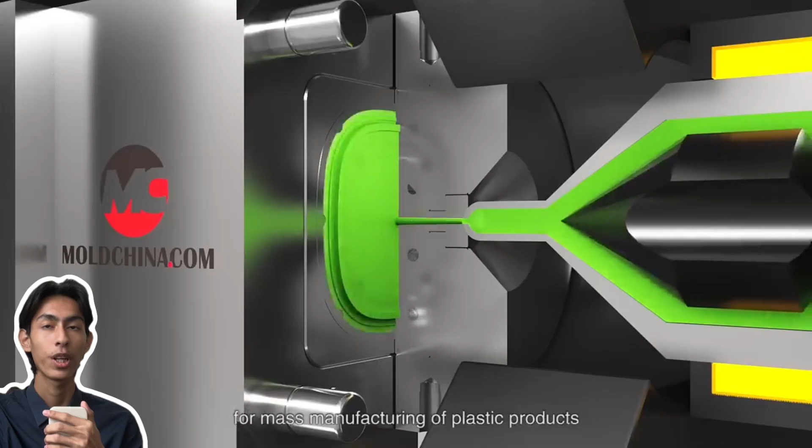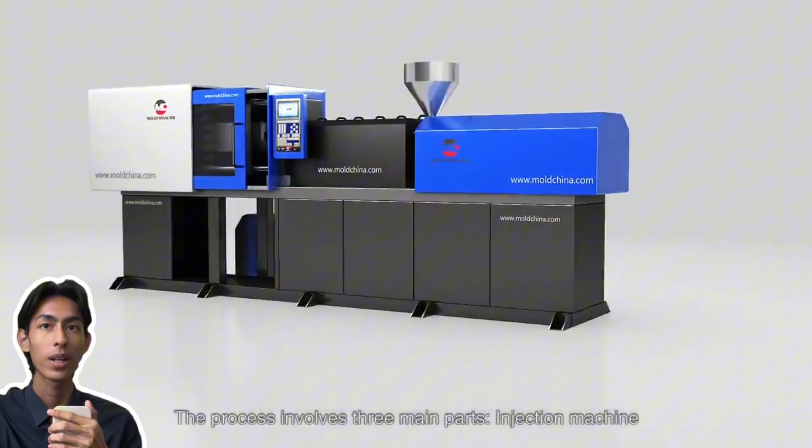Injection molding is the most common method of mass manufacturing of plastic products. The principle is simple: inject the molten plastic material into a mold cavity, let it cool, and then solidify it into the same shape as the contour of the cavity. The process involves three main parts: the injection machine, the plastic injection mold, and the plastic pellets.

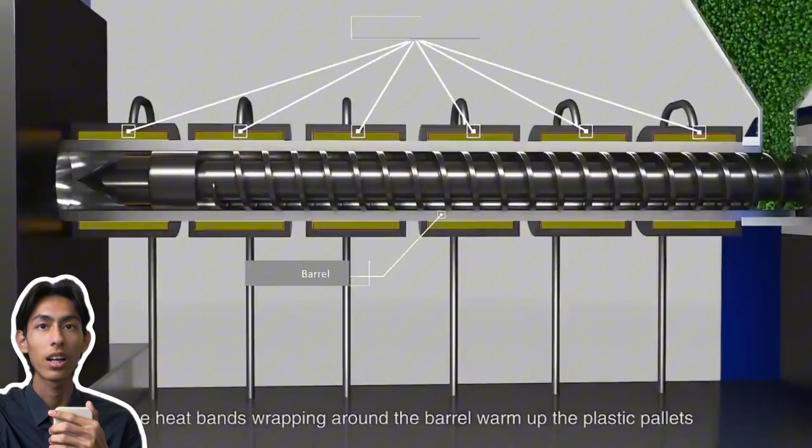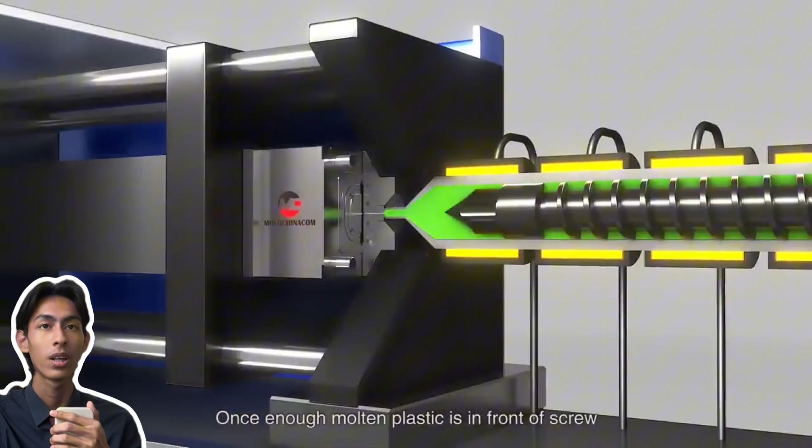Plastic pellets in the hopper are fed into the barrel. Then the rotation screw transports the pellets forward while the heat bands around the barrel melt them. As the pellets move forward, they gradually melt into molten plastic. Once enough molten plastic is in front of the screw, it injects it at high pressure into the mold cavity.

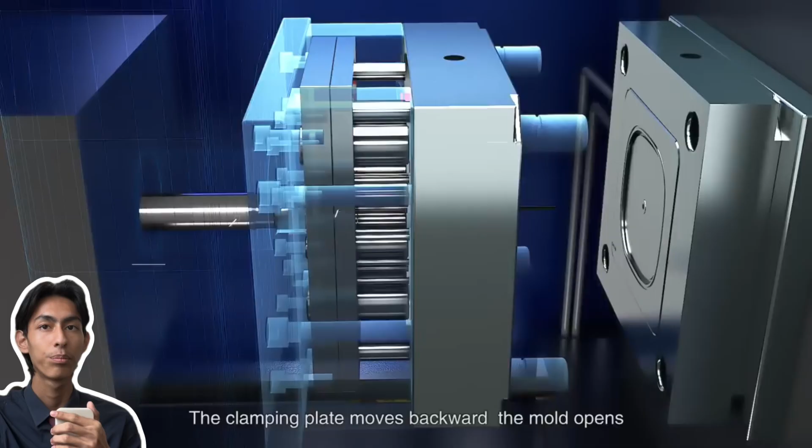The mold temperature is controlled and kept much lower than the barrel, so the molten plastic solidifies quickly. The clamping plate then moves backward, the mold opens, and the ejector pin pushes out the finished part. After that, the mold closes again and the cycle repeats.

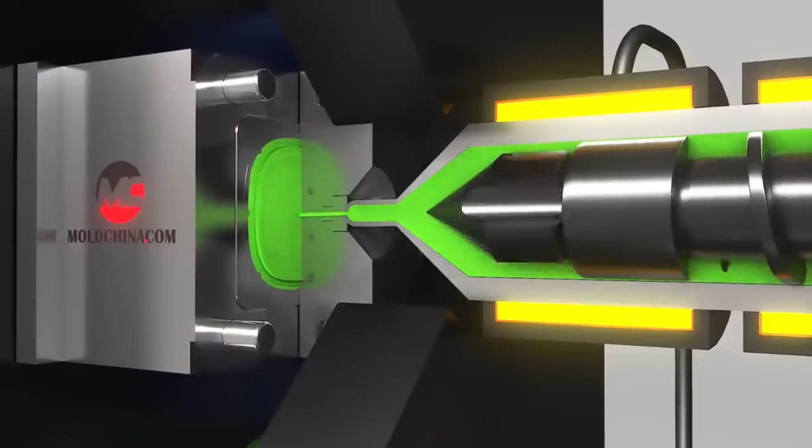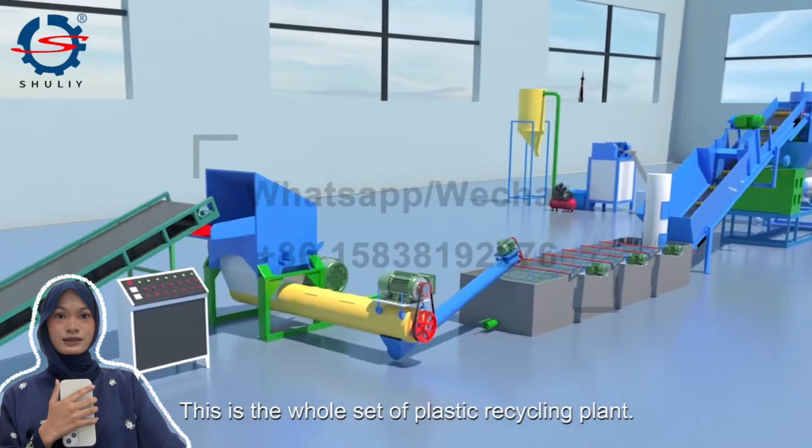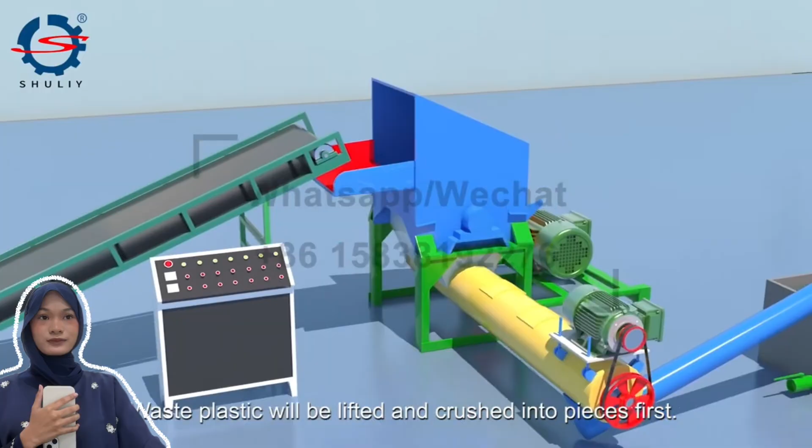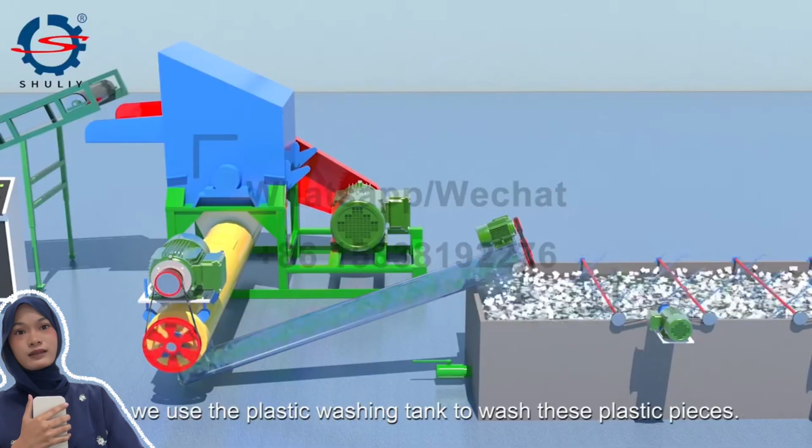This is the whole set of plastic recycling plants. Waste plastic will be lifted and crushed into pieces first. Then we use a plastic washing tank to wash these plastic pieces. After washing, the plastic pieces will be dried and lifted into the plastic granulator machine.

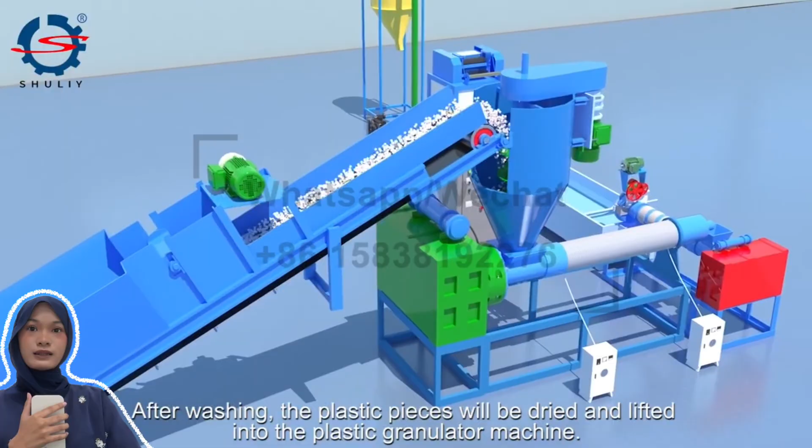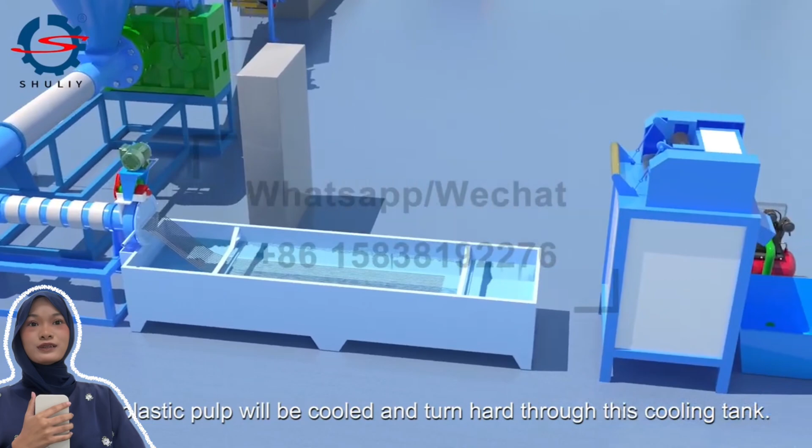Through electric heating, the plastic granulator can melt the plastic and extrude the plastic pulp. The plastic pulp will be cooled and turned hard through this cooling tank. Then the cutter machine can cut the plastic rod into pellets.

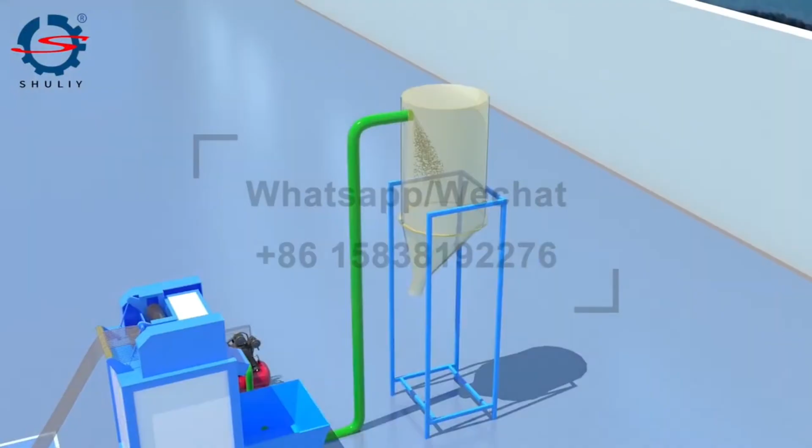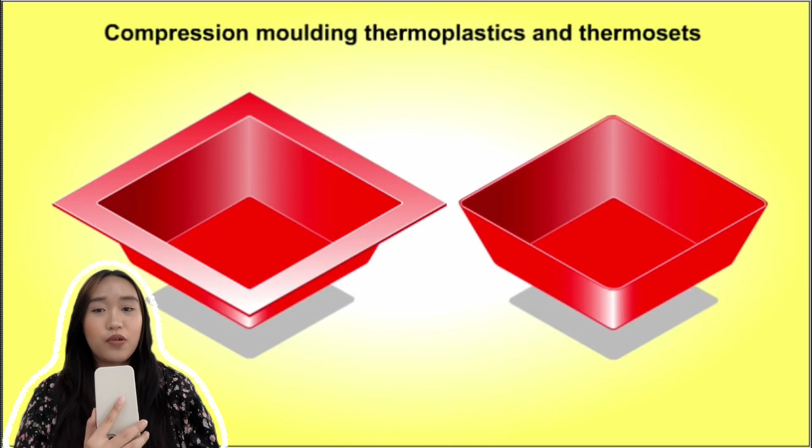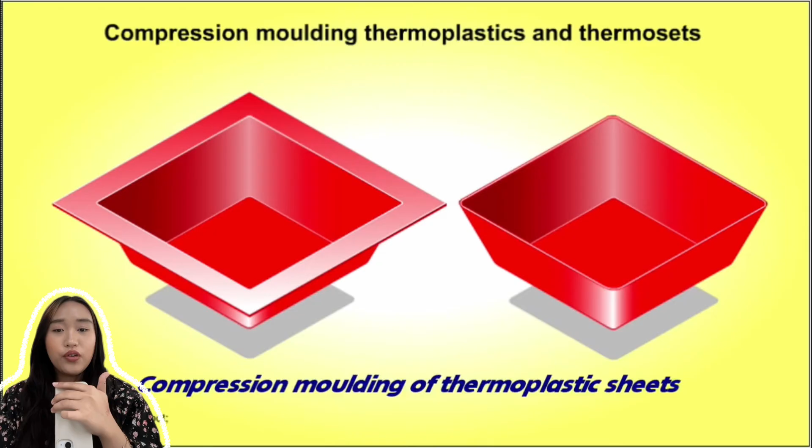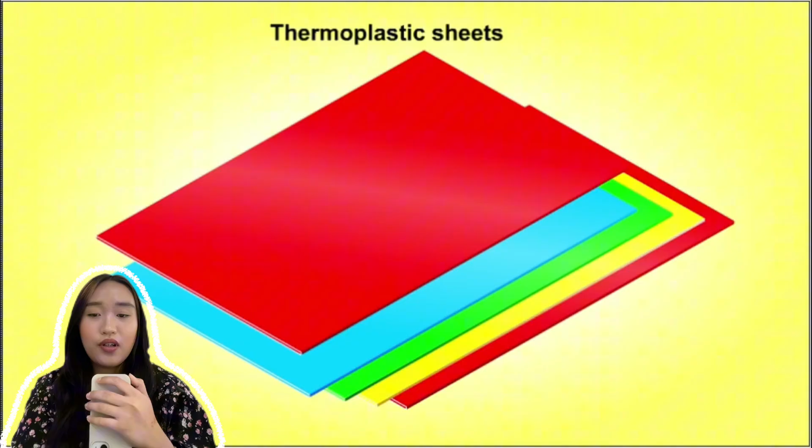This video will show you how dished plastic products like boxes and trays can be made by compression molding. I'm going to show you compression molding of thermoplastic sheet, like acrylic, polypropylene, and polyvinyl chloride. Thermoplastic sheets are usually stiff boards, so they have to be softened by heat before they can be reshaped by compression molding. The thermoplastic sheet is heated in an oven until it's soft and floppy.

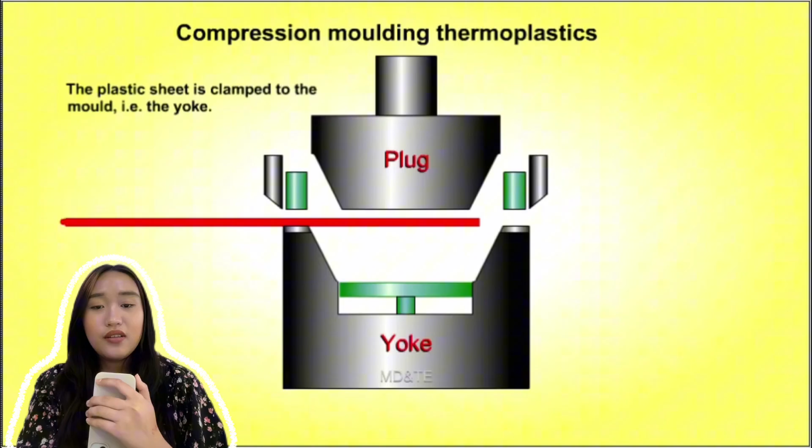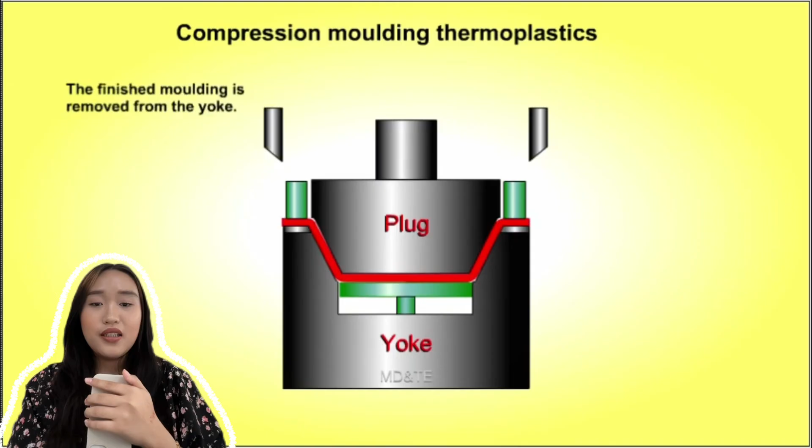It is then quickly transferred to the mold and clamped in place. Next, the plug is lowered, forcing the softened plastic into the mold. The plastic molding is allowed to cool and harden, and excess material is trimmed off. The molding is ejected from the mold and the molding cycle starts again.